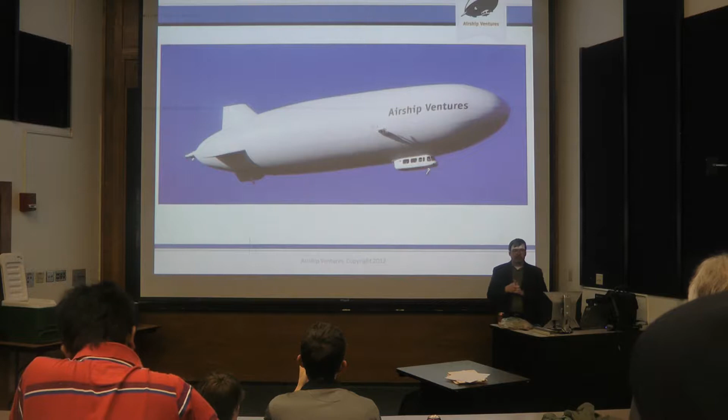The regular Zeppelin company was, let's say, put into storage at the beginning of World War II, but they put their funds into a trust fund, and it sat there gathering interest for the next 50 years until they decided to restart the production line in 1998.

They started designing a brand new airship, and called it Zeppelin NT, Zeppelin New Technology, and this is the result. So it still has a rigid frame, but now the frame, instead of being on the outside of the airship, is on the inside.

It's called 07 because that was the original size of the envelope, 7,000 cubic meters. Ours got a bit of a stretch. The reason we're the biggest airship is because ours is 8,000 cubic meters. We have an extra frame in ours, which makes it a bit longer.

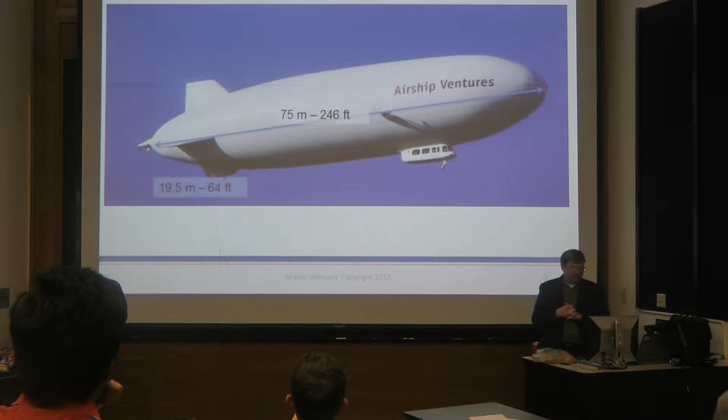So in size, it's big. It's 246 feet long, 75 meters, 64 feet across the fins, 19.5 meters, and 17 meters tall, 57 feet from the bottom of the nose wheel to the top of the fin. So by any measure, it's a big ship. We're 15 feet longer than a 747-400.

At our maximum weight, if you could take all the helium out of the airship and put it on a scale, it will weigh 17,725 pounds, which is the amount of mass we have. Our useful load is 4,299 pounds. That's fuel, oil, passengers, and equipment, which is considerable, a good 2 tons of lift that we can pick up with this airship.

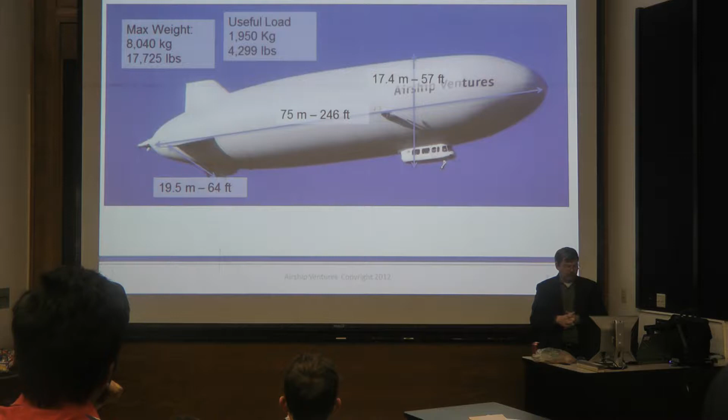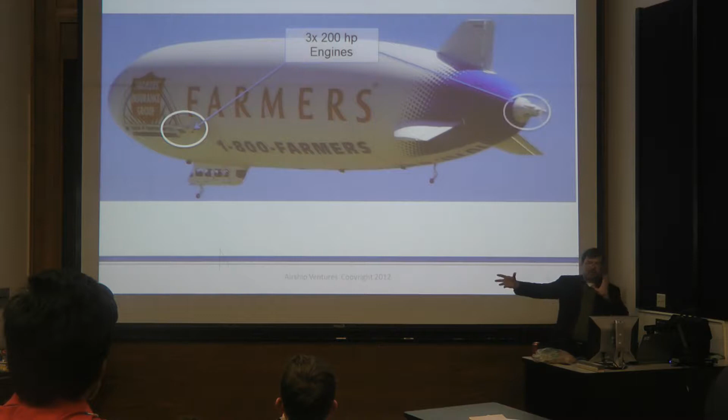You'll notice two very unusual things about our airship if you've seen blimps before. First, our engines, instead of being mounted on the gondola down where the people are, are mounted up here on the side. They're mounted on this rigid internal frame underneath the envelope. There's a carbon fiber structure that looks like an upside down bridge, I'll show you a picture of it in a second. But our engines are mounted up on the side of the envelope.

The second bit you'll notice is we have a tail engine, just like a helicopter does, a tail rotor. It's actually two propellers connected to a single engine through a gearbox. One propeller sits sideways, and one goes up and down. That gives us true vertical takeoff capability because the airship can maneuver with these vectoring engines. I'll show you the vectoring here in a second. There are three IO-360, pretty standard aviation Lycoming engines.

Fuel injected, they're exactly the same engine. I used to own a Cessna Cardinal, and it's exactly the same engine that was in my Cessna Cardinal. Our max speed is about 65 knots. Our regular cruise speed is right around 40.

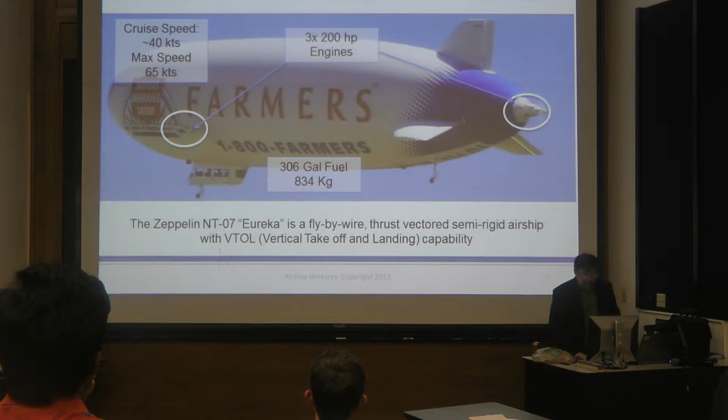So when the airship's at zero airspeed, that aft power plant has got one propeller pointing up and down that's pushing the tail of the airship up and down, and then a second propeller that's pushing the airship right and left. If you think of a regular blimp, you've seen a Goodyear blimp, when they come into land, they kind of land like an albatross does.

You've seen the pictures of albatross landing. It's not a very elegant affair. For blimps, it's not a very elegant affair either. And that's because below 10 knots, about 10 miles an hour, they don't have enough air blowing over their fins to control their airship anymore. So in other words, they become a free balloon. They go completely out of control once their forward airspeed drops below 10 knots.

So what they do is they fly into the ground at a speed greater than 10 knots while they still have control, and then have the crew come out, about 10 guys, 10 to 20 guys come out, grab a bunch of ropes and wrestle this airship to a stop, which is, as I said, not a very elegant process.

Our airship, on the other hand, comes to a complete stop 50 feet off the ground, all three engines pointed up, tail engine pointed down, front engines pointed up. Comes to a complete stop because we have this aft tail rotor. We have complete control over the airship at zero airspeed here, and we make all of our takeoffs and landings vertical.

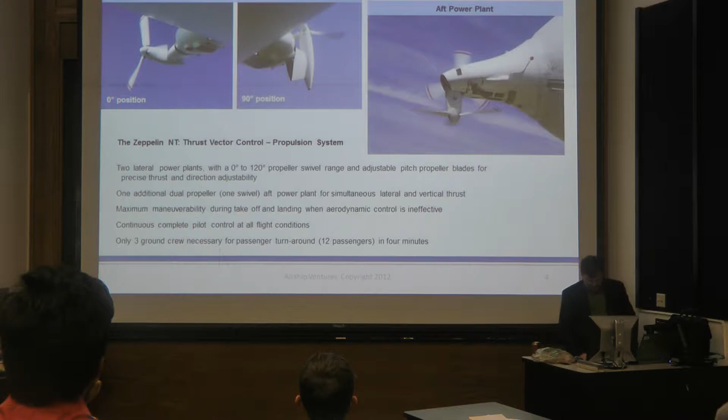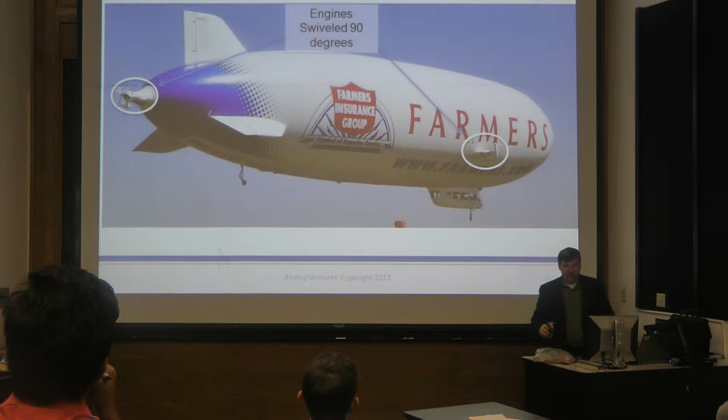It wasn't unusual for some of the bigger airships back in the 30s to require a 100-man ground crew, which is kind of hard when you go, I want to go somewhere in my airship, and then I got to ship 100 guys ahead to go catch the airship on the other side.

So this is what she looks like in her takeoff configuration. You notice that the forward engines are tilted up, and the aft engine is tilted down, so to give us control. In level flight, that rear engine comes up, the front engines go down, and everything's pointed in the forward direction.

Everything is suspended down, a bit like a helicopter in that regard. Everything's suspended from the rotor head. In our case, everything is suspended from our buoyancy, from our helium that's up in our bags. If we take the helium out of the airship, we actually have to support the frame.

Yes, sir, do you have a question? Where is the helium in all of this? If everything's suspended above, it's in this big bag. So it's all just uniformly throughout that one cell? It's just one helium cell, yes. We have...

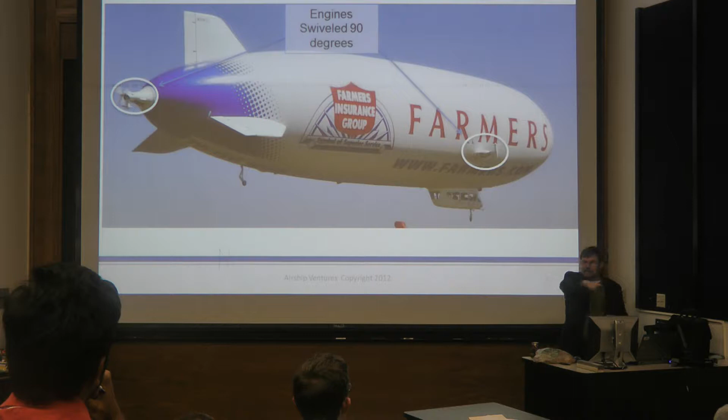Are those struts inside built of aluminum or carbon fiber? They are carbon fiber in the middle with aluminum ends, much easier to weld on the aluminum, so the ends are all aluminum and the middle parts are carbon fiber. One that's the size of that table you're sitting at weighs about 10 pounds. It's amazingly light, one person can pick it up alone.

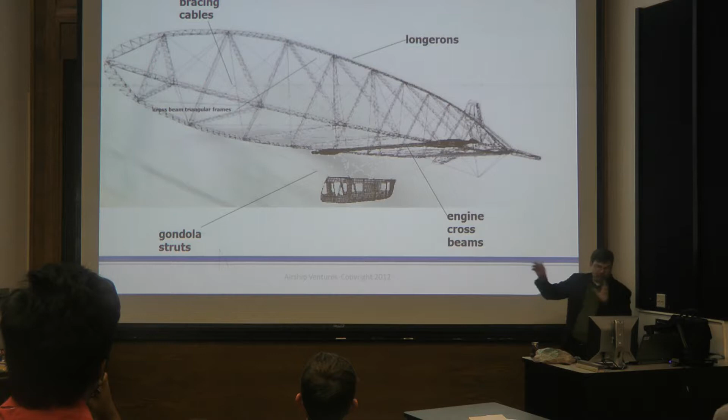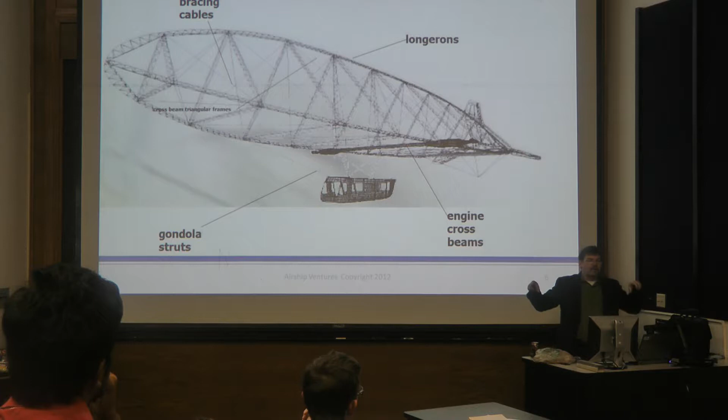These long struts, so the long parts are carbon fiber and the end pieces are aluminum, where they join together. You'll also notice the cables, which are actually the structural part of the airship. The cables are the actual structural members, they carry all the loads. In the middle is what we call the dog bone, where the engine is attached. It's a box spar made out of carbon fiber, and inside that box spar are our fuel tanks, a handy place to keep those.

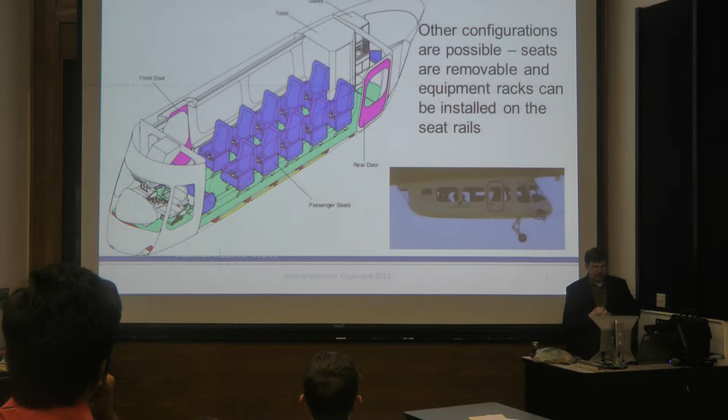This is the gondola. It seats 14 people, 2 pilots and 12 passengers. We also have a bathroom, which one of our British pilots christened 'the loo with the view,' because it has a window in it, so you don't miss anything while you're visiting the bathroom. On long patrol flights, believe me, having a bathroom is really nice. I've been in this airship for 8 hours at a time. We don't have the galley though, that was an option the Zeppelin company put into the marketing brochure but didn't actually deliver in any of the airships. So we're still waiting on the galley, haven't finished that one yet.

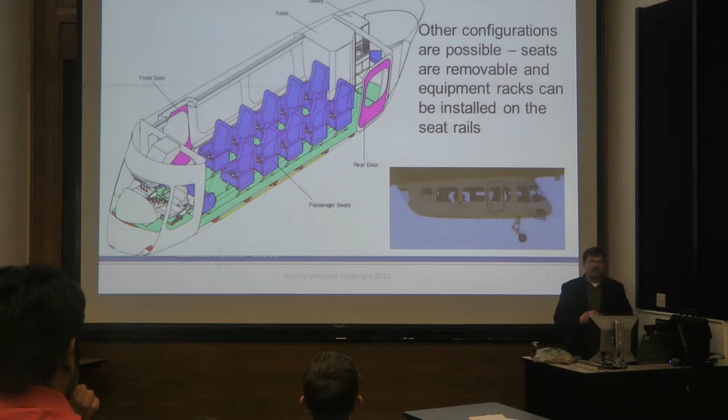We have 2 doors, one in the front, one in the back, on either side of the airship. Anyone want to guess why we have one door on each side? Yeah, in case we fall over. Yep.

Airships have a long and proud history of patrol over the ocean, primarily with the Navy, using large blimps to scout for submarines in World War II. It's said that not a single ship was lost while being escorted by a blimp. The blimps protected over 89,000 ships.

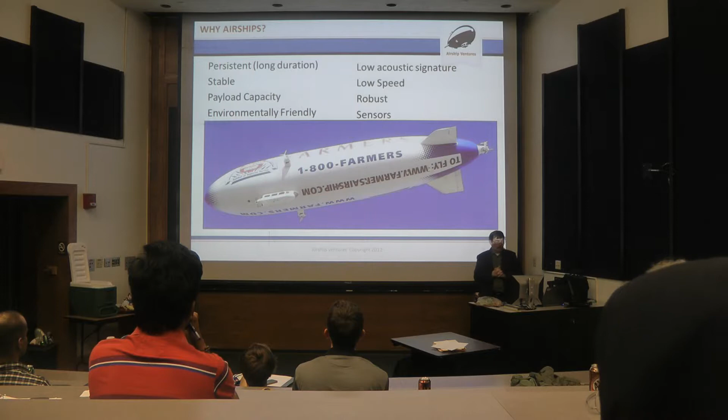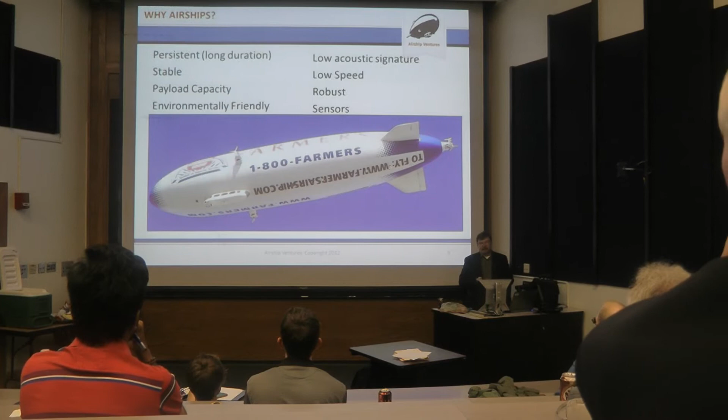So why airships? Why are they coming back? Why is everybody talking about airships? And it's not just me. We have Airship Ventures, you've got us guys, you've got of course the Goodyear blimps and the DirecTV blimps and the light ships, the Snoopy and so on.

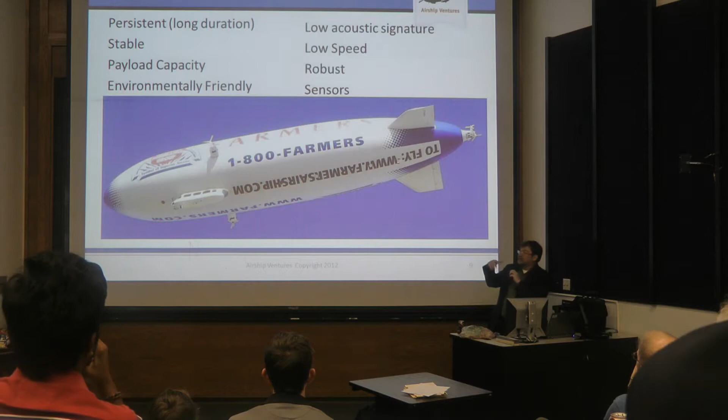You probably saw in the news that Northrop Grumman has just launched the LEMV, which is a 300-foot-long, triple-lobed airship, a hybrid air vehicle, one that gets more of its lift out of forward motion and wings than out of its helium. It only gets 60% of its lift from helium and 40% from its shape. We get 95% of our lift from our helium and 5% from our shape.

Or from the engines. And then Lockheed Martin has got 3 airships under construction right now. They've got their SkyTug, which is a commercial venture, a commercial airship. The HAA, High Altitude Airship, a project to put an airship that's supposed to stay, I think, for 6 weeks in the stratosphere at 60,000 feet. And then they've got ISIS, the Integrated Sensor Is Structure, a DARPA program to create an airship where the envelope itself is a giant radar antenna.

It's kind of a cool concept. The structure and the antenna is the envelope of the airship.

The pilot can fly for very long periods of time. The airships are very, very stable. If you got to ride on our airship, you'd notice it feels way more like a boat when it's in the air than it does like a plane. It kind of rocks with the air currents, and it's floating in the air, so it feels much more like a boat than an airplane.

We have a very large payload capacity. We're extremely environmentally friendly, I'll go into that in detail in a bit. We make very little noise, we have very little vibration, and we can fly at low speeds. Airships are extremely robust and survivable and tough.

Believe it or not, you're basically flying a giant beach ball through the sky, and it's very hard to damage a beach ball, because if we hit anything, we're just going to bounce off. So they're actually very, very robust systems, and that's been proven over and over again.

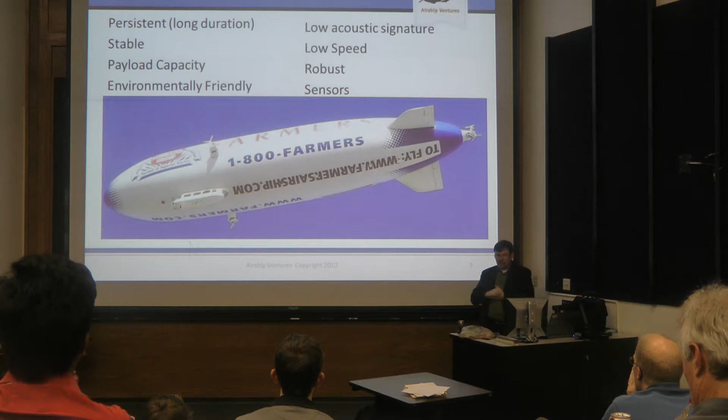Another example is we don't bank when we turn, we turn completely flat. The airship just has a rudder, it doesn't have any ailerons, so it does not roll into a turn like an airplane does, it turns flat. So the sensor remains on the target as you're making your turn.

So, safety record. This is one that people just don't believe me when I say this. I'm going to stand here and pound on the table a little bit and let you know the truth, because we've suffered from public relations problems, and they all start with the letter H.

Airships have the best safety record of any flying vehicle there is. We have a much better record than balloons, helicopters, airliners, small planes, you name it, if it flies. The safest thing you can be in the air is an airship.

I went and actually looked up all of the accident statistics. I've looked at every airship accident since back in the 30s. There have been exactly 2 airship fatalities, not 2 incidents, but 2 people killed in the last 50 years. Since 1962, there have been 2 airship fatalities.

Airships are flying, there are currently 48 airships flying in the United States, and like us, almost all of them fly every single day. We fly 5 days a week, 8 hours a day, 11 months out of the year. So we're not sitting on our butts, we're flying every single day, and that's the accident record of airships.

Helicopters kill over 1,000 people a year, much less over half a century for airships. The last time a passenger was killed on an airship was 1937 in New Jersey. That is the last time a passenger was killed on an airship, was 1937.

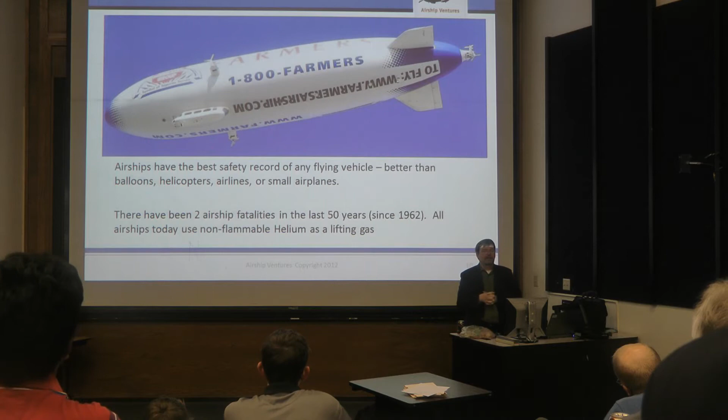Helium collects underground in natural gas deposits, and it's a natural byproduct of drilling for natural gas, which is great because there's natural gas all over the place, even here in Fort Worth. The problem is it takes a $500 million extraction plant to get the helium out, and they've only built two of those. There's just not an economic case up until now. Now that it's $200 a gallon, a bottle, they'll start doing more.

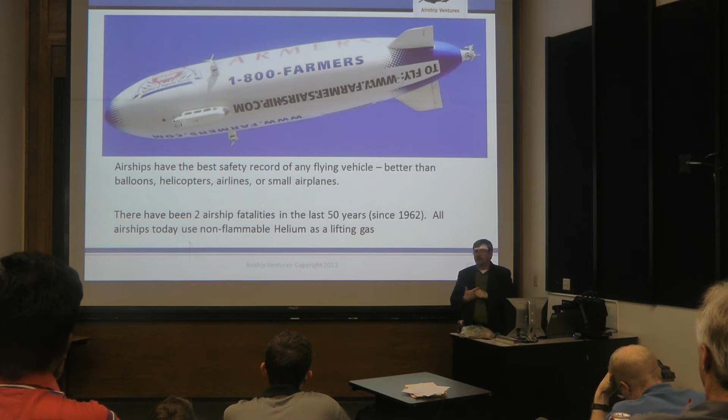Besides the plants going offline, the big user of helium in the United States is MRI machines. They sit in a liquid helium bath - I've been told and verified there's 1,700 liters of liquid helium in every MRI machine, which is an enormous amount. So that's the big issue, and it's very hard for us to say we need helium for our airship, can you please not put helium in your MRI machine? We're going to lose that case every time.

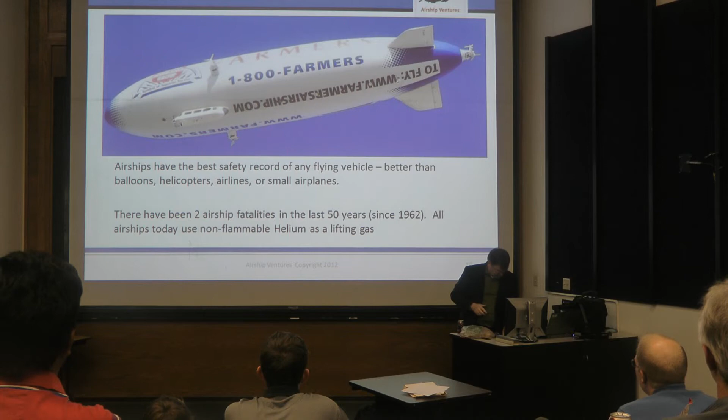I did have a nice conversation with the director of the National Helium Reserve in Amarillo, Texas. There's a giant salt mine with 7 billion cubic feet of helium in it - 70 billion, some large number, it's got B's in it. Anyway, they're trying to help us.

So let's talk about sensors. The reason I like talking to UAV people - let me explain the business model we have for our airship. Our airship does three things. We do passengers - we're the only passenger carrying airship in the United States. We're the only people in the U.S. where you can go buy a ticket and fly on our airship. We're very proud of that.

We do advertising, as you probably guessed - that's putting people's logos on the side of the airship. We are not owned by the people who put their names on our airship; we merely rent out the side as any other good billboard would. Just our billboard flies and carries passengers. We act as a flying billboard. And we do what we call special missions, which is actually everything else that's not any of that.

A big part of our revenue comes from acting as a surrogate UAV. So what we do with our airship is take UAV sensors and UAV components and fly them for people who are developing UAVs who can't get flight time, because there are only 3 or 4 places in the U.S. where you can fly your UAV legally. So we've been flying UAV components, sensors, and systems on the airship, both as an engineering test model to do proof of concept and to do risk reduction for UAV designers.

We have been taking UAV systems where they can't go by themselves, like downtown Los Angeles and over the San Francisco Bay, where you cannot legally fly a UAV. Over Monterey Bay, we can take sensors places where they can't go because we're a fully FAA certified airship, so we can get clearance to fly anywhere an airplane can fly. And we're crewed and manned.

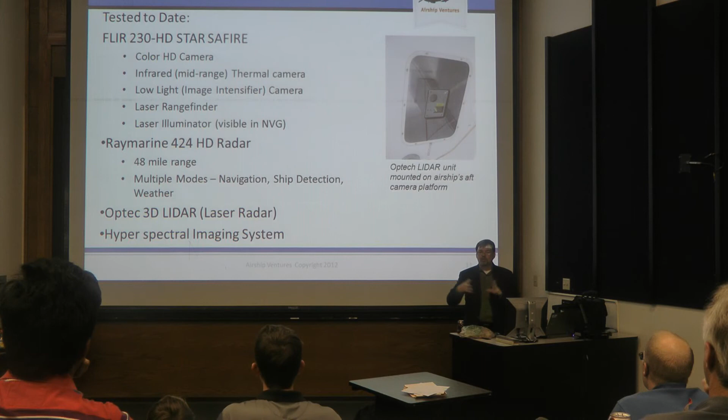So we've been flying sensors for people. I'm going to tell you now about some of the sensors we have been flying on the system. I just finished testing or qualifying the FLIR 230 HD Star SAFIRE. We have, by the way, two built-in camera platforms - we've got one on the nose of the airship, right in front.

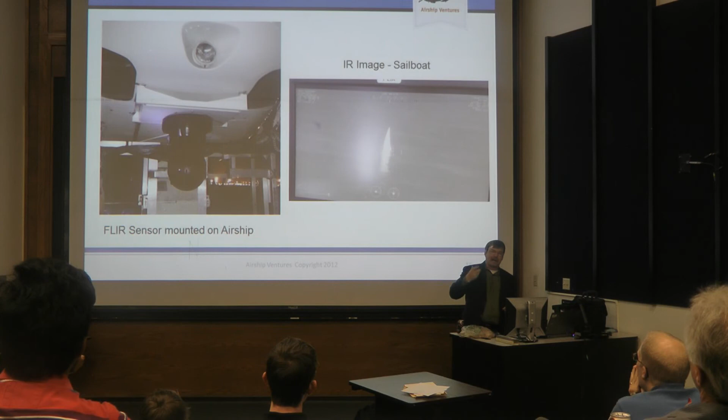On the airship, right on the nose is a camera platform that we normally use for sporting events, where we carry a big Westcam 14-inch ball on that front camera platform. We've also got an aft camera platform that extends up to the bottom of the airship, which is this one you see here in this picture.

This is our aft camera platform. We call it the nadir platform because it points straight down to the ground, and we generally put downward pointing sensors on it. The aft platform is rated for 400 pounds and the forward platform for about 320 pounds, so they're both pretty sturdy and can carry fairly large, substantial payloads. We can carry two big sensor balls.

We've been carrying a FLIR. This FLIR doesn't weigh much at all, but it has a color HD camera, an infrared camera, a low light camera, a laser rangefinder, and a laser illuminator. Makes it a very useful device.

We've flown that offshore in maritime patrol modes where we look for smugglers coming in off the ocean. It's also been used as we've been doing wildlife surveys for some people who've been hunting for large wildlife. We had one person call us up wanting to rent the airship and the FLIR.

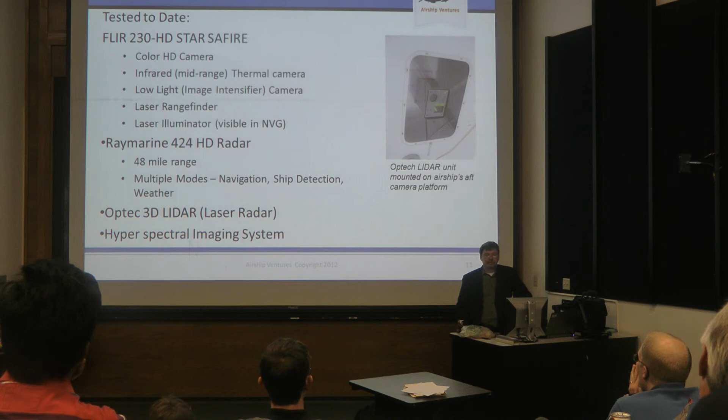And he said he was looking for this large mammal up near Seattle. You guys catch on fast. Very good.

Very good, yes. So we made up a little patch with a Bigfoot on it to go for that mission. But yeah, we had somebody actually rent us to go look for Bigfoot.

One of the recent missions we were very proud of is we got hired by NASA and the SETI Institute, the Search for Extraterrestrial Intelligence. There was a large meteor that fell over Northern California and landed in, believe it or not, Sutter's Mill. Sutter's Mill is the site of the California Gold Rush, where gold was found in 1848.

That's why the football team is called the 49ers today. The meteorite landed right in the middle of the gold fields out in Northern California.

So we took the airship a week later with a super high resolution camera and flew at about 800 feet, searching for 3-inch and smaller bits and pieces of this meteorite. It went to about 10,000 feet and exploded, shattering into thousands of pieces scattered all over the place. According to the scientists, we found about 10 fragments using the airship. That was a very cool mission, and we had a lot of fun doing that.

We've worked with Raymarine, flying some of their marine radar units, mostly for tracking boats, flying them offshore. We can use them for navigation, which is kind of cool because you can navigate in very poor weather conditions using the radar as a navigation system. You can detect boats, of course, and it also operates as a weather radar, except it's 360 degrees, and it's mounted on the bottom of the airship.

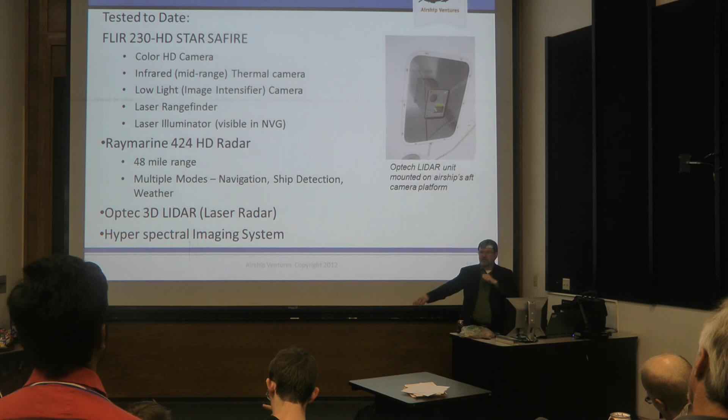This device you see in the picture is an Optec 3D LiDAR. LiDAR is my favorite sensor, because I've been involved with them heavily for a number of years. We use them a lot on unmanned ground vehicles, and 3D LiDARs paint a 3D image of the ground. As we fly over the ground, we project a cone of laser light onto it and measure the time it takes the laser pulses to go from the airship to the ground and back again, creating a centimeter-level quality 3D map of the terrain. You can do some absolutely amazing stuff with these 3D maps.

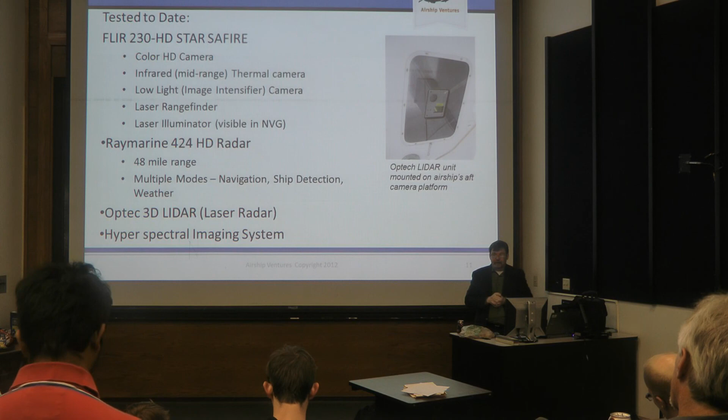We had one project at a previous company where we were hired to count all the trees in Switzerland. That was kind of cool. They actually keep track of the trees individually in Switzerland, so they know if somebody cuts one down. They're all surveyed and numbered. Yeah, you want to talk about anal government, but that's another story. It's a good job.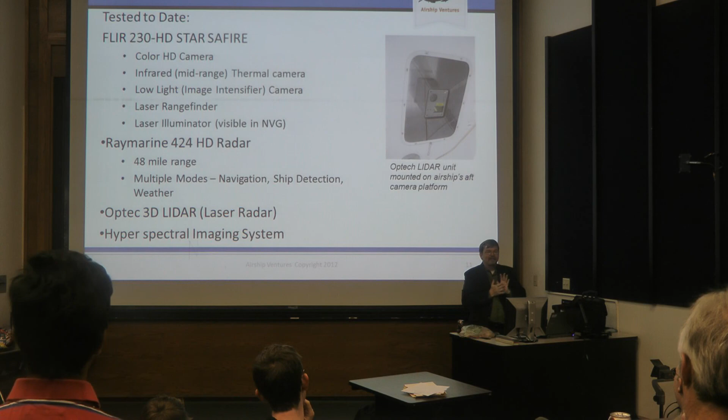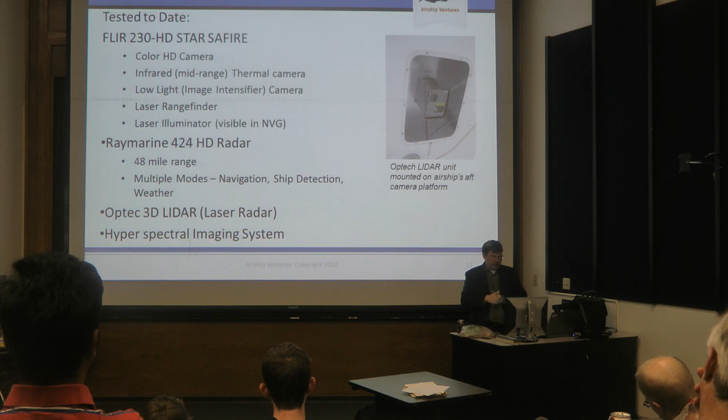They've been used extensively over in Houston to study flooding, because you can make an extremely accurate rendition of the ground plane. You can see where the water is and where it's going to collect and go, particularly in a flat place like Houston, which only has a few places for water to go. I can tell you all sorts of things about your topography.